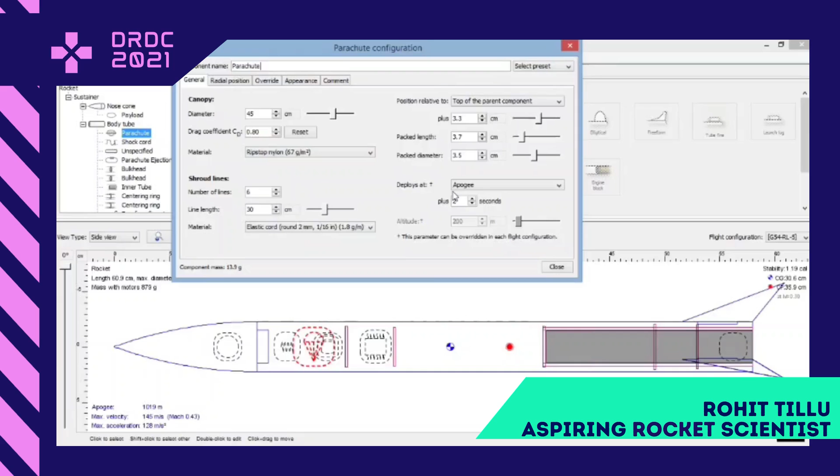At this point you can see the apogee. The deployment of the parachute will happen at apogee plus 2 seconds. The point at which the velocity of the rocket is 0 is called the apogee, the extreme topmost point. Then, 2 seconds after that point, the parachute will get detached.

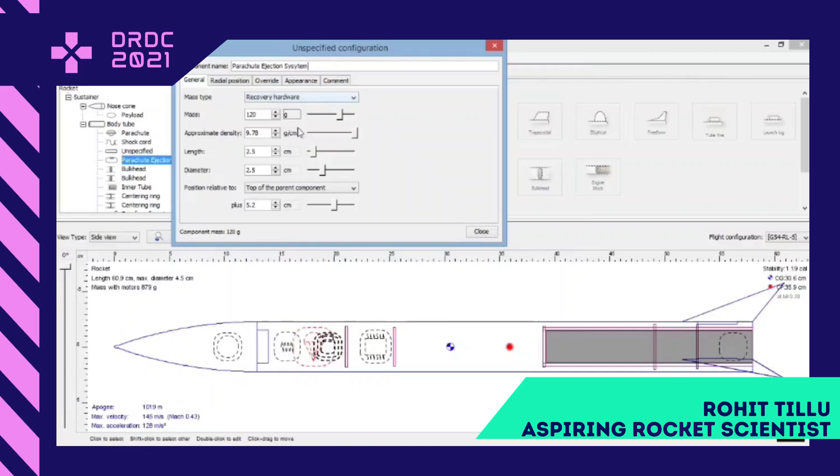Along with the parachute, we have connected a shock cord. One end of the shock cord is connected to the mainframe, while the other is connected to the shoulder of the cone. The shock cord's purpose is to absorb the shock during the ejection of the parachute. Here you can see multiple parameters of the same. This is the mass and length, diameter, etc.

Later, the parachute ejection system comes. This system has a piston which is given tension with a spring, and one end is connected to the microcontroller. After the extreme altitude plus 2 seconds, this will give an activation call to the piston and it will get released and the parachute will get ejected.

The next part is the flight control board. It is the Teensy 4.0 microcontroller, connected with multiple sensors like barometer, SD card reader, gyroscope, and connected with the LiPo battery. This system will help the rocket to decide when, where and what action to take.

This is the fin. The purpose of the fin is to maintain the flight trajectory during the flight. The design of the fin must be such that the drag is maximum. Here we can take an example of an arrow. The arrow has the feathers at the tail, which have most of the drag, because of which the arrow travels in a straight line. This is the general shape of the fin. We have considered the appearance as well as the center of pressure calculations for making this type of fins.

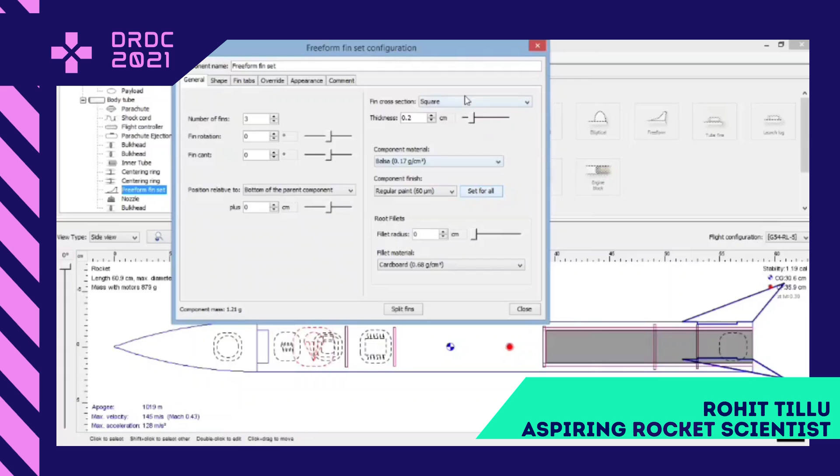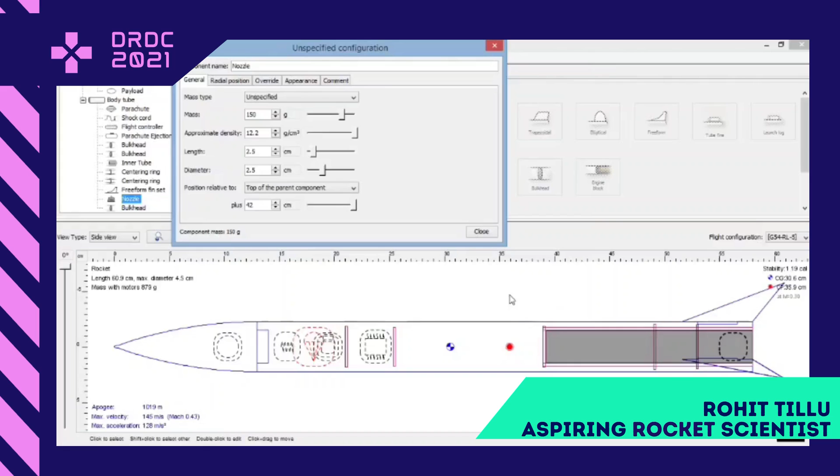This specific weight is given for the nozzle. This is an innovation part I have tried to do in this project. I have designed the nozzle shape and done its analysis on SolidWorks, and we can't show this on this software, so I have given the weight dimensions and weight criteria in this for later simulation calculations.

Here comes the motor part. Last but not least, the main part of the rocket is the motor. I am using a Cesaroni Technology Incorporation company's G54RL5 motor for my rocket. The dimensions of this motor are: the diameter is 29 mm and the length of the motor is 187 mm. This motor follows all the rules of the competition, like the motor has an impulse of 160 Newton seconds only.

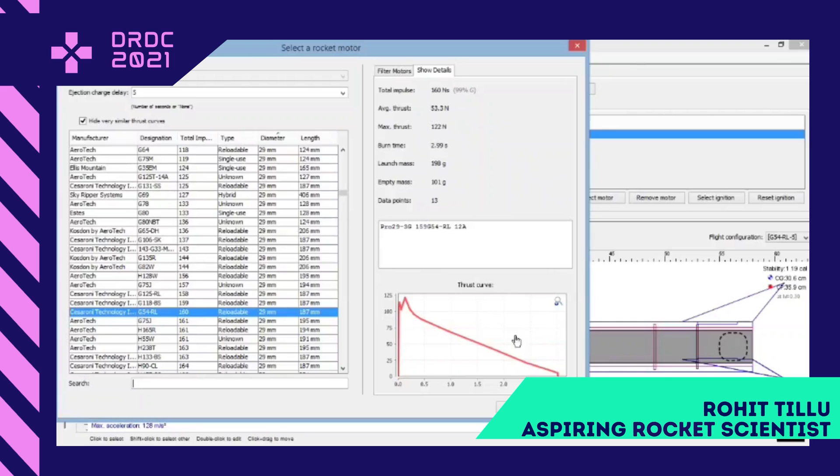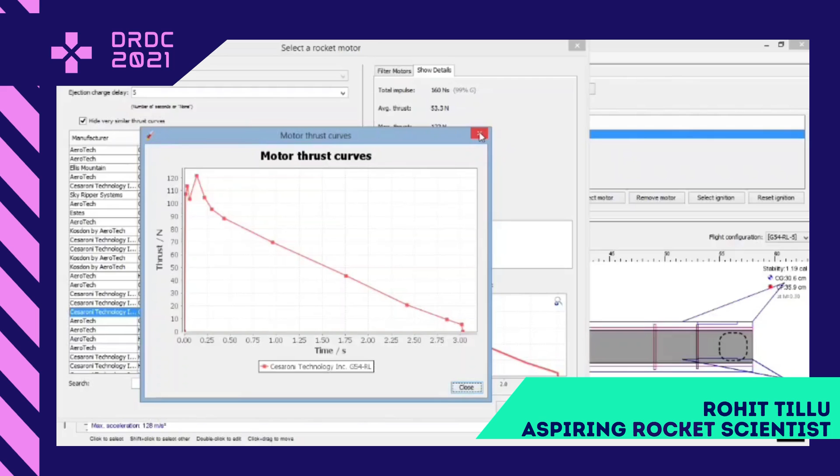Along with the burn time of 2.99 seconds, the propellant mass is 97 grams. As the launch mass is 198 grams minus empty mass of 101 grams is equal to the mass of the propellant, which is 97 grams. Here we can see the chart of the motor thrust curve. This shows the impulse and thrust curve properties.

This is the weight of the motor, the weight of the rocket without the motor, and this is with the motor. You can see the weight constraint is also being followed as the rule book was given.

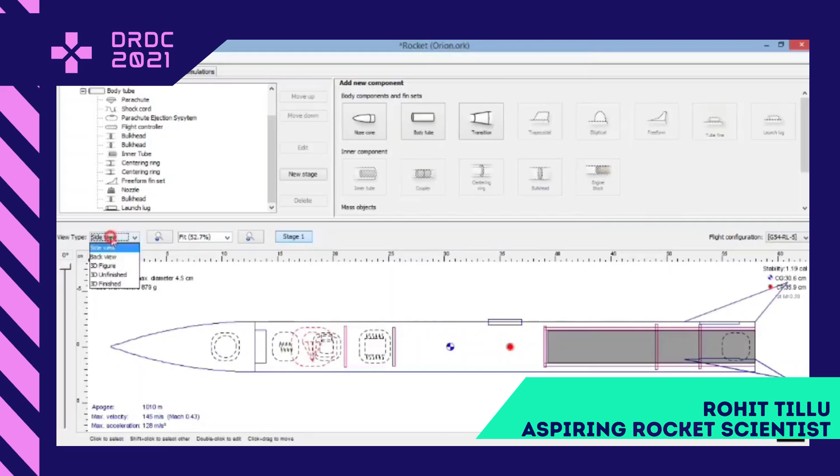Here in this section you can see the length is 60.9 centimeters, maximum diameter is 4.5 centimeters. These are the CG and CP calculations, I mean the distance from the nose cone. This is the 3D figure. You can see it shows the internal part of the rocket. This is the 3D unfinished figure where you can see multiple material structures and the parachute stuff.

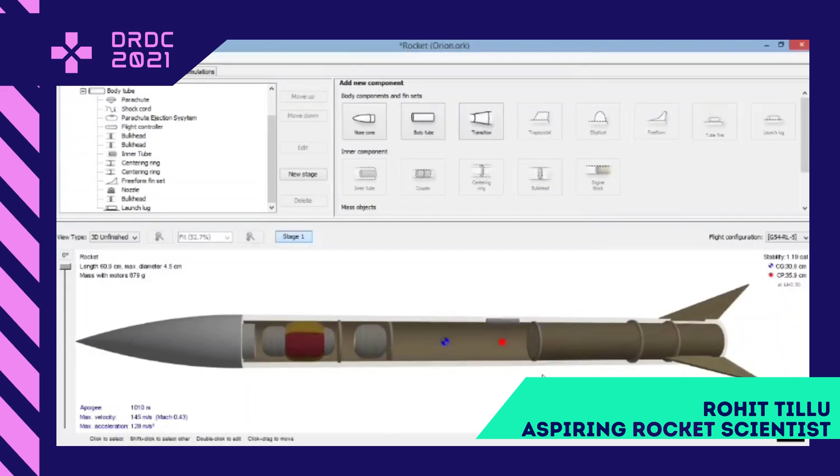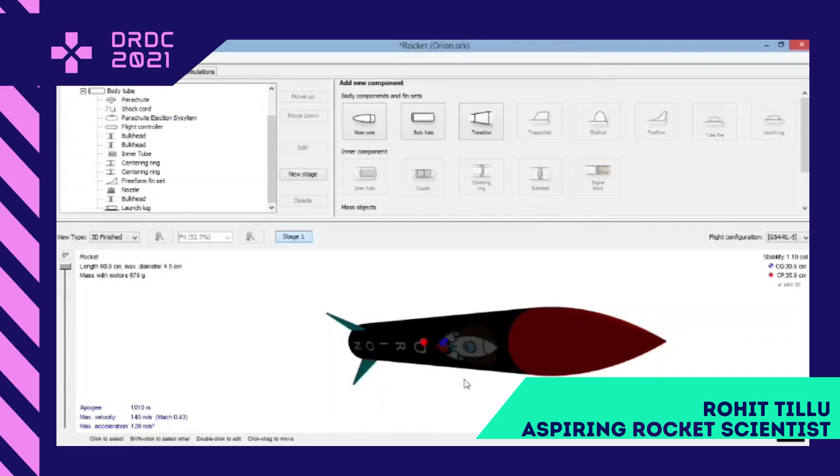Where is the CG located? Where is the CP located? The blue color part is the center of gravity where all weight of the body is concentrated. This is the finished 3D rocket design. I have given some stickers on it which I like the most, and color as per my liking. So this is the basic design which I have constructed.

And now here comes the simulation part. Here the simulation is going to be run and we'll see how the calculation comes out. Here I have run the simulation. You can see the configuration of the motor in the first part, the velocity off the rod, the apogee, which is 1017 meters. That is, it is also following the constraint of going above 1000 meters.

The velocity at deployment is 16.6 meters per second. Optimum delay of the motor is 11.3 seconds. Maximum velocity is 145 meters per second. Maximum acceleration comes to be 129 meters per second squared. The time required to reach the apogee is 14.3 seconds, and the total flight time including after the apogee and ejection of the parachute is 115 seconds. The ground hit velocity is reduced to 9.92 meters per second.

These are the basic results of the simulation which we get from this software. Later in the section we can also see the plots, and multiple parameters are plotted against multiple parameters like time and altitude, time and thrust, and many more. We will see this in a further section.

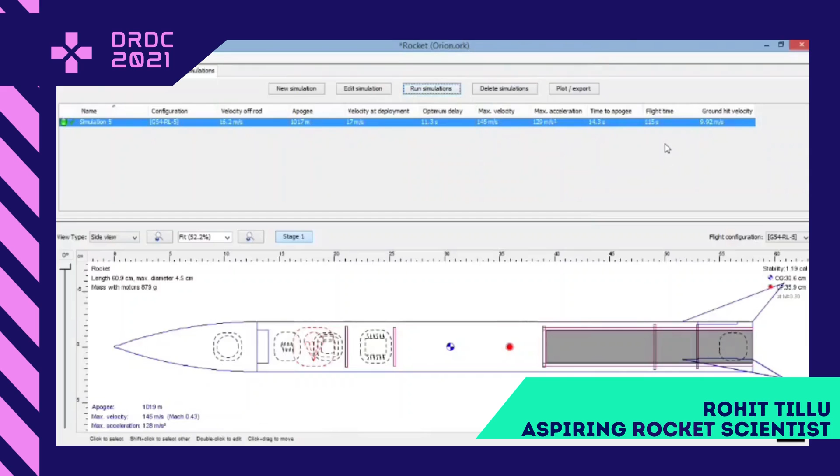Here we can see the plot section. We can plot multiple parameters in this section like time with respect to altitude, vertical velocity, vertical acceleration, and many more. Here are some examples, what we can see like apogee, launch, etc. We will select all and plot the graph.

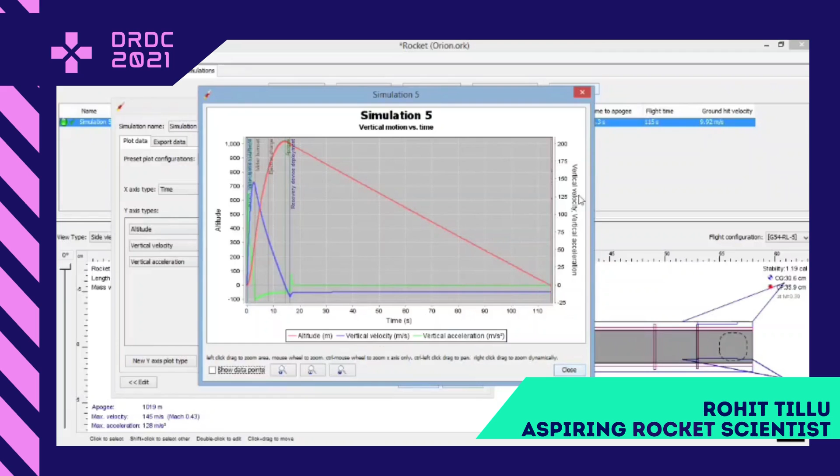Now we will see here. This is the graph of vertical motion with respect to time. Here it is given as altitude, vertical velocity, vertical acceleration. It is given multiple y axes, like for altitude it is different, for vertical velocity and acceleration it's different. You can see the colors they are given for specific stuff.

Like this we can zoom. The red color portion shows the altitude, and the straight lines which you can see are the launch time, apogee, and multiple parameters. The blue color is the vertical velocity and the green is the vertical acceleration. Like this, you can pan to the normal view by clicking on this icon.

This is the simulation of altitude with respect to time. Out the apogee, parachute ejection system, and ground hit.

Here you can create custom options also. This is the custom menu. Here is the x-axis point. This generally we take as time. Here is the y-axis, whatever you choose to plot with respect to time. Here I am choosing the propellant mass. Okay, first we will choose thrust and later we will choose propellant mass.

Now we will plot the graph for the same, considering all the parameters. Here we can see this plot. Now we will zoom the plot and see what the parameters are. Here you can see the thrust is in red color and the propellant mass is in blue color. The bottom portion shows the time and the thrust curve.

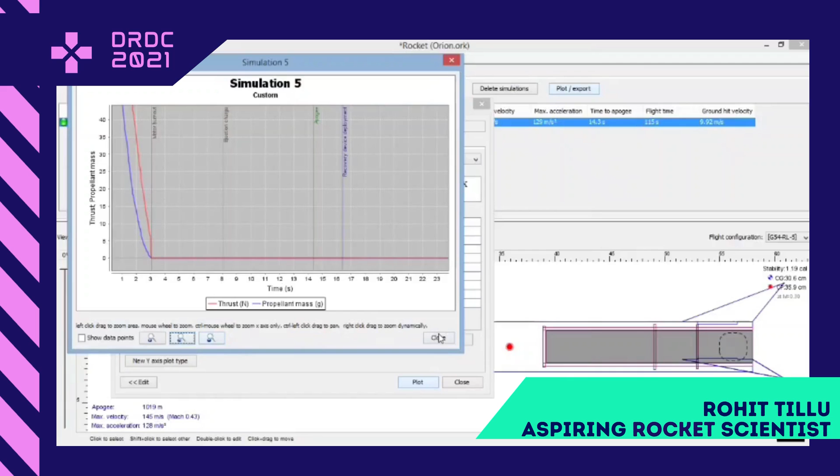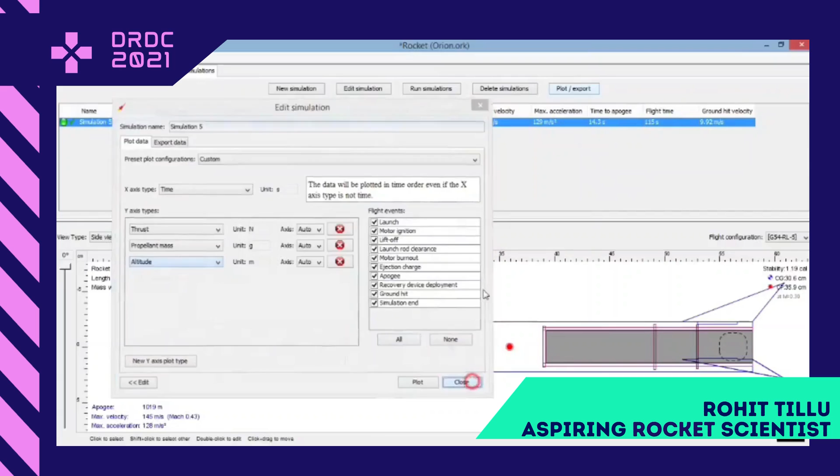Here you can see the propellant mass is decreasing, and before 3 seconds we have a burnout time of 2.99 seconds. So before that it goes to 0 and later it remains constant. Like this, in this section you have multiple parameters you can plot with respect to time or with respect to multiple parameters. In this section you can export your data as a CSV file.

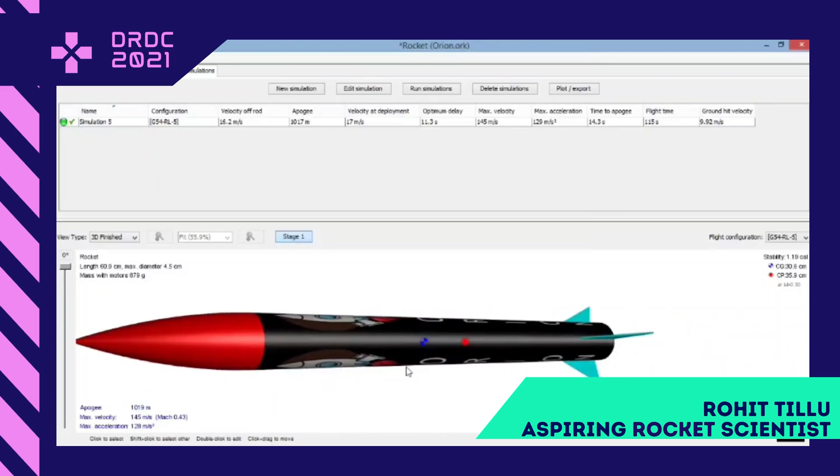Thank you for showing interest in my design. This is all I wanted to tell you. This is also a Photoshop, we can say, that the software is providing.